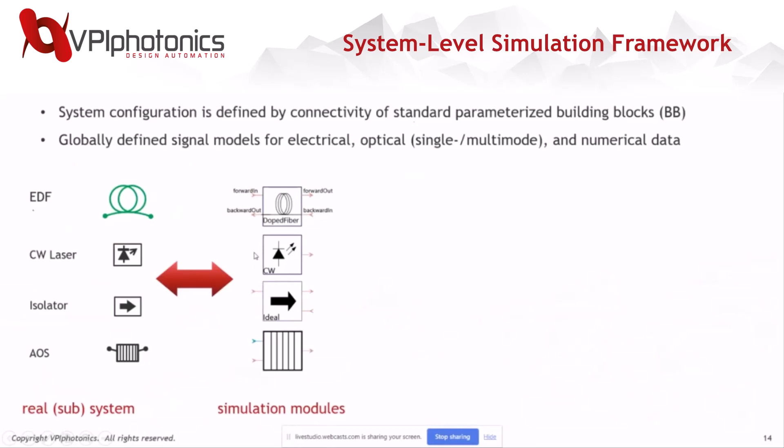Even in some cases, if there are no modules provided by default by our library, we provide a co-simulation interface for the users. This interface allows the users to create their own modules using, for example, MATLAB, Python, C++, and so on. One more important thing, once we have decided what module we want to have instead of our real component, we need to specify its parameters. For example, in case of the CW laser, this module will have several parameters that need to be specified by the users: its output power, its line width, its center frequency, and so on.

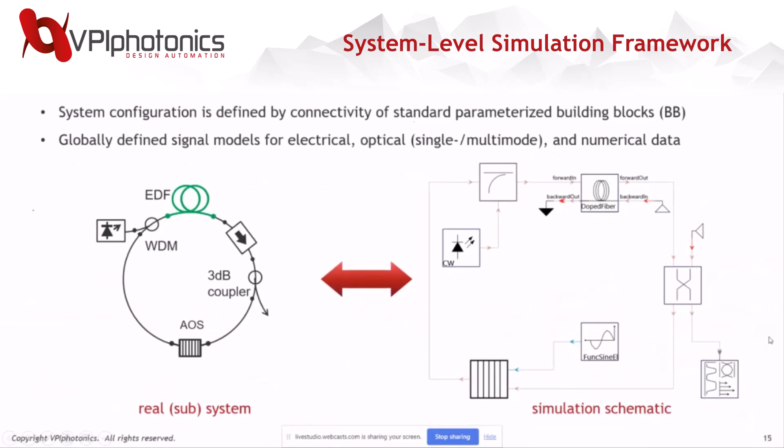And once we have decided what modules we want to use and their parameters, our next task is to combine the modules in the simulation in the same manner that they are combined in the real system. And this looks like a Lego-based approach. We provide a set of various components, and then using these components and combining them in different manners, the user can create his own simulation setup. And now when the simulation is composed, we can try to run the simulation. When we run the simulation, we use a so-called data flow approach to propagate our signal in the system.

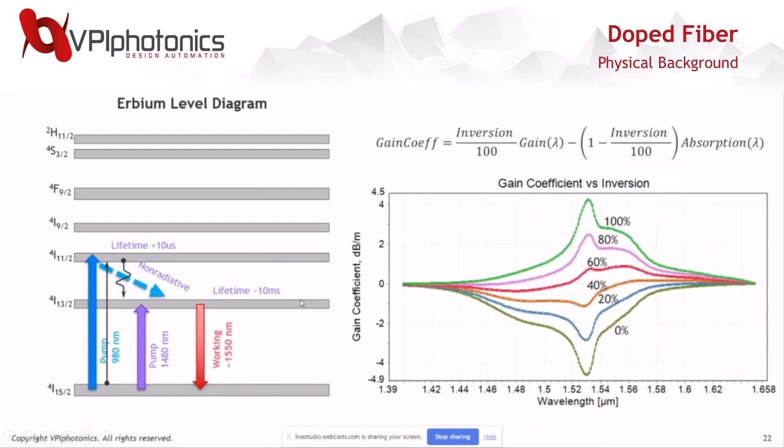And then when we have some excited ions, when the ions go back from the excited state to the ground state, they can emit photons. And these photons can be used to amplify our signal inside of the system. And of course, the higher inversion we have in the system, the higher will be the gain of the system, because fewer ions can absorb the photons in our signals.

And now let's talk how to describe this mathematically. So in our simple two-level system, we have three main processes. The first one is stimulated absorption of photons when the ions are being excited. And then the ions can relax through two processes: through the spontaneous emission, and this is not good because the amplifier creates additional noise in this case, and through the stimulated emission, and this is a good process when our amplifier amplifies the signal.

And for the stimulated transition rate, we can write down the following equation. To characterize the stimulated transition rate, we need to know the so-called emission and absorption cross-section of the erbium ions inside of the amplifier. Also, we have the spontaneous transition rate, and it's reciprocal to the lifetime of the second level.

And one more important thing that we need to know to characterize our amplifier is the so-called signal ion overlap factor. So this factor shows us how well the mode of our amplifier is aligned with the doping profile of the fiber.

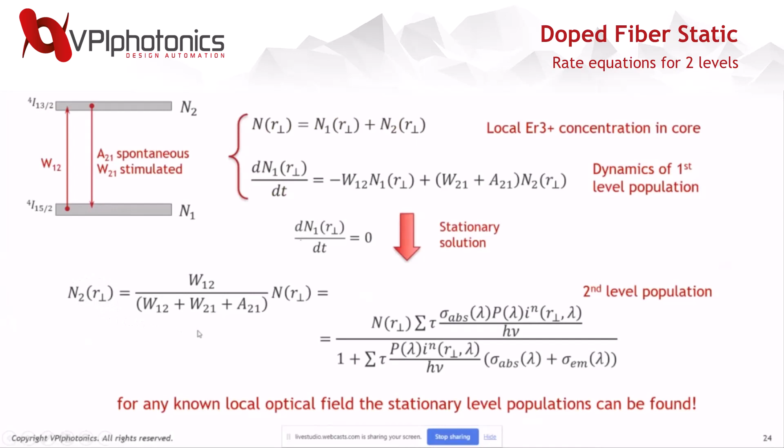And this is very good because now if we know the optical power at some specific fiber point, we can easily calculate the population inversion at this specific point of the fiber. And this allows us to write down the optical propagation equations.

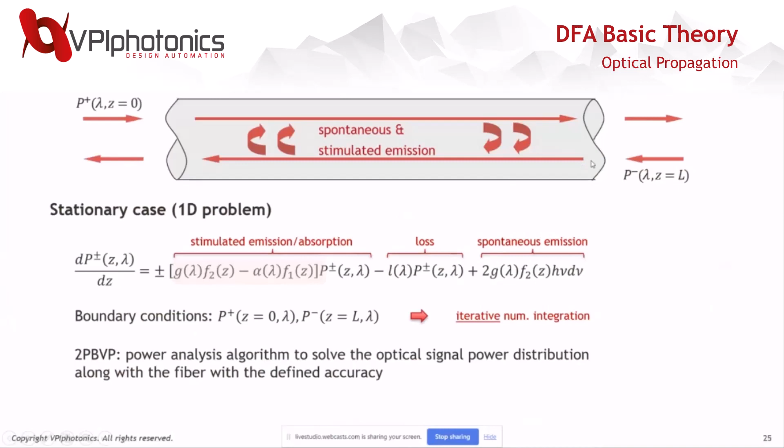This problem is called a two-point boundary value problem, a quite well-known problem, and we have standard differential equation solvers to find the power distribution along the fiber. And then we can even visualize this power distribution.

Okay, now let's talk about more complex models. Sometimes the lifetime of the third level can be quite long, and in this case we need to take into account the third level even for erbium ions. We need to modify the equations. Now we have three levels. And also we can add more terms that describe more complex behavior of our amplifier.

First of all, we can take into consideration excited state absorption, when the third or second level can additionally absorb one more photon. And also we have terms responsible for up-conversion. This is the effect when two ions interact with each other, and after interaction one ion goes back to the ground state and the second ion goes to the higher state. These are not very good effects, and they spoil the performance of our amplifier.

And in that case, using this nonlinear system of equations, we can find the level populations and then solve the optical propagation equations.

Just to sum up our single-mode doped fiber static model: it supports various doping types, including erbium, ytterbium, thulium, and erbium-ytterbium, and it can work with various signal representations, both detailed and coarse signal models. It can be characterized using Giles or cross-section fiber parameters. And it can take into account various higher-order effects, such as spectral hole burning, concentration quenching, excited state absorption, and many more.

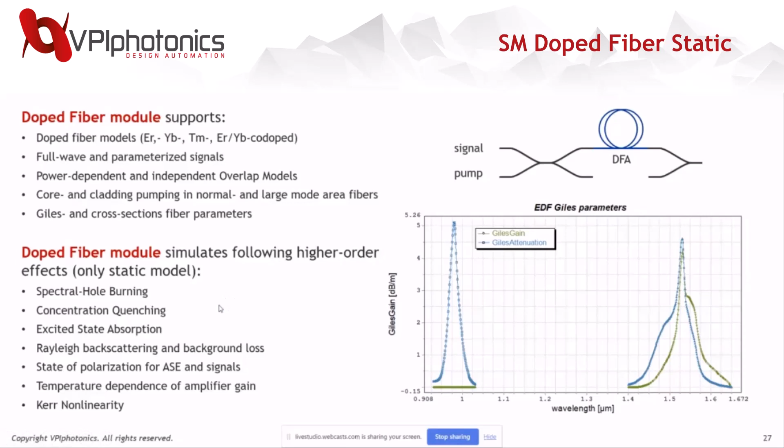Also, if we want to take into consideration multimode fiber, we have a model for this, and mostly it's very close to the single-mode fiber model. The only difference is that now we have to take into account several modes, and for each mode we need to separately calculate the signal-ion overlap factors, and also take into account that these modes don't have radial symmetry. So we need to calculate the integrals in a more complex way. Otherwise, it's quite similar to the single-mode doped fiber model.

Possible applications of this model are investigating multimode fiber amplifiers when we want to reduce mode-dependent gain, which we can do by optimizing the index profile, doping profile, and so on. Or we can use this model to simulate high-power fiber lasers by simulating core-cladding pumping and calculating all necessary overlap factors.

And also, we have a dynamic model. As I mentioned, the static model assumes that nothing changes in time, so the fiber amplifier is in dynamic equilibrium. But sometimes, for example in a WDM system, we drop or add channels, so the system will change its state because something changed in the system.

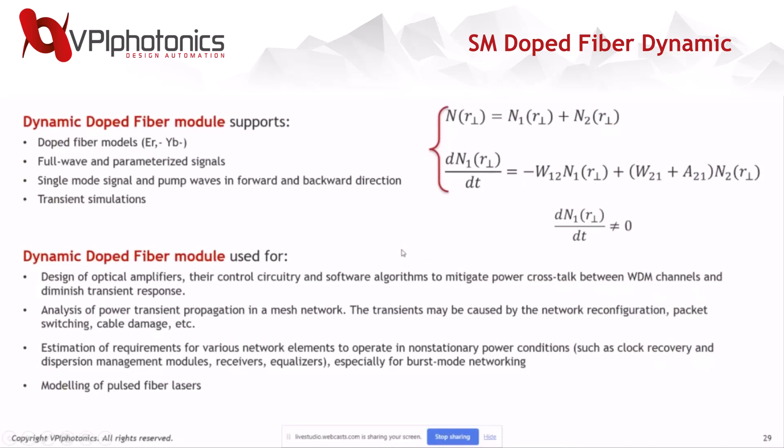Okay, and now I will jump to the software to show an example and how it works. So now you should see the software itself. So this is the simulation schematic that we are using. And here you can see the sketch of the experimental setup that we are trying to reproduce.

Also on the left, you can see our module library that provides various models for your real devices. For example, we have a folder called Fibers, and here we can find all fiber models that we have. And you can decide what fiber model you need to simulate this specific real setup. Yes, and now I will run the simulation.

And now we will briefly discuss what we have here. So here we simulate the high-power ytterbium-doped fiber laser, and the system looks as follows. We have two pumps on the left and the right, and as an active medium, we have a double-clad ytterbium-doped fiber, and to create a cavity, we have mirrors with a 4% reflection. To simulate this setup, we need to run several iterations to get a steady state solution.

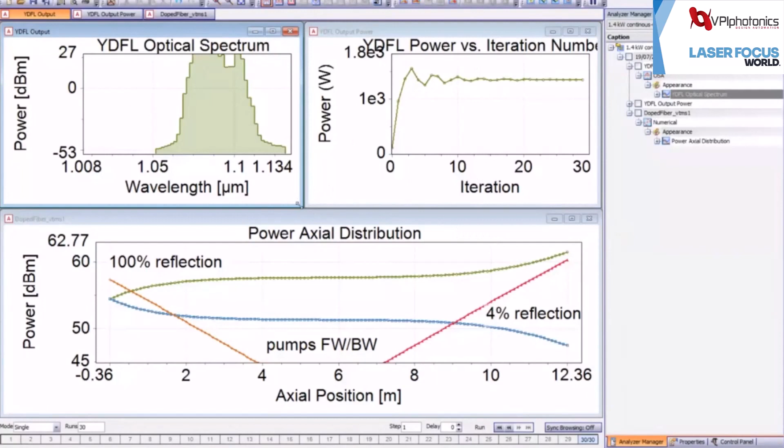And now we can see how it looks. Here we can see the output spectrum of our amplifier, and we can see how this spectrum was looking in the beginning of the simulation, and then how it was changing when our signal was traveling in the cavity back and forth. And finally, here we have a stable output spectrum.

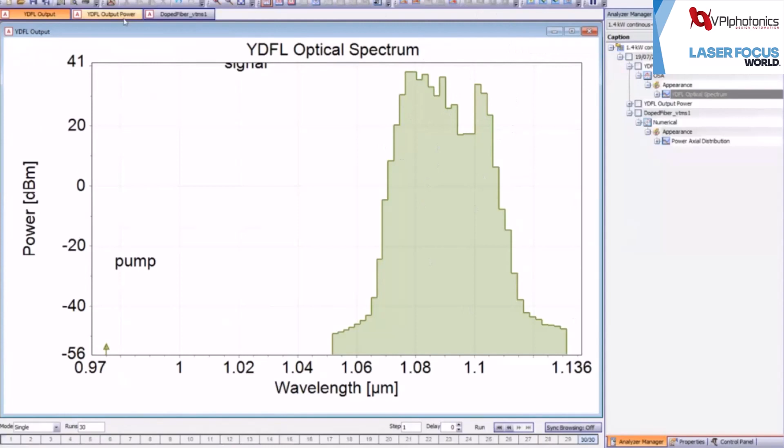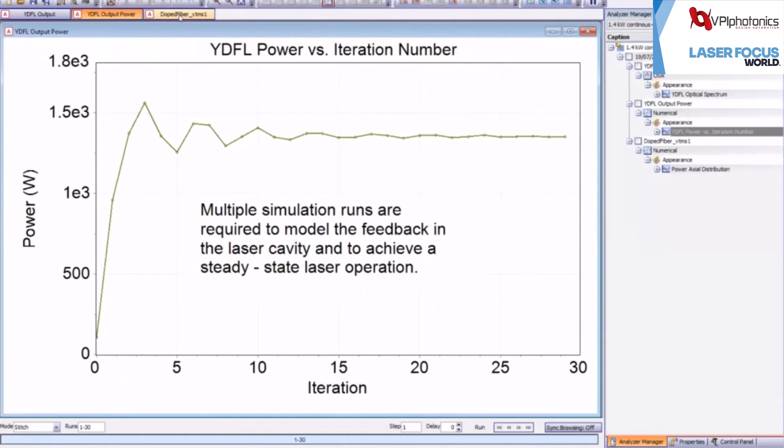Here we can see that when the signal is reflected on the right side of the fiber, it's amplified in the beginning due to this backward pump. Then it travels through the fiber without any amplification in the center, and again on the left side of the fiber the signal is amplified due to the forward pump.

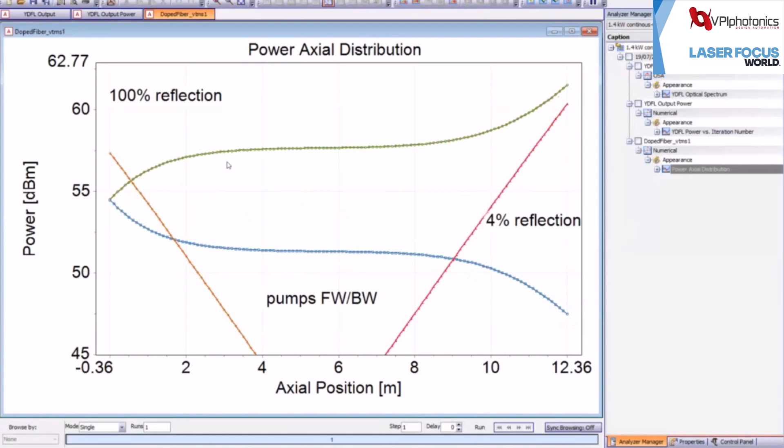Then here we have 100% reflection, and the signal starts traveling back, so it's amplified in the beginning of the fiber, in the center not so much, and finally the signal is amplified at the end of the fiber due to the backward pump. And finally, here we have a 4% reflection mirror, and that means that 96% of laser power leaves the fiber, and 4% is reflected. And again, we start the cycle when the signal travels back and forth in the cavity.

Okay, jumping back to the simulation. So again, here is the simulation setup and the simulation results. Also, we have compared our simulation results with experimental results, and our simulation results were in quite good agreement with experimental results.

Okay, and now let's talk about the undoped fiber models. Now we are talking about usual silica fibers that are used to transmit the signals between the network nodes and so on. And again, the problem is quite similar. We know what we put inside of the fiber, but we want to know what the fiber's output is.

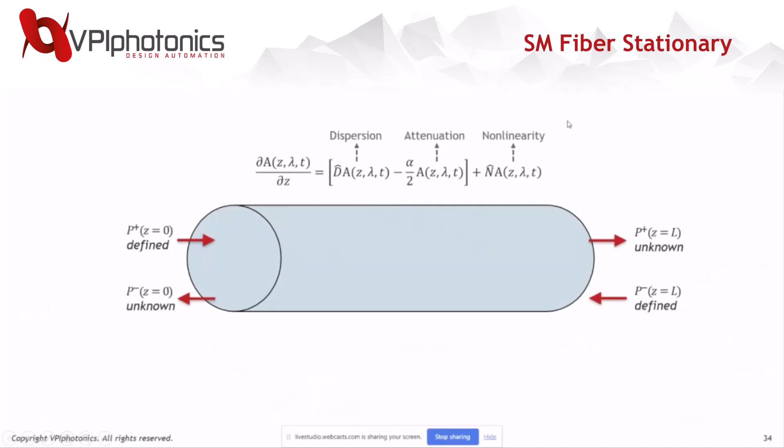To describe the signal propagation in the fiber, we need to use the nonlinear Schrödinger equation. In this equation, we need to take into account the dispersion effects in the fiber, the attenuation of the fiber, and also the nonlinear effects. The nonlinear effects include Raman scattering, Brillouin scattering, Rayleigh scattering, Kerr nonlinearity, and many, many more.

And of course, if we try to solve this problem as it is, using this nonlinear Schrödinger equation, we will have problems because the dimension of this problem is quite high. We will have a 2D grid that takes into consideration the time and the position along the fiber. And if we try to solve it, it will be quite hard.

And for this, we developed a so-called two-step approach to make the problem simpler and to speed up the simulations. We divided the problem in 2 steps. So at the first step, we replace our signals with their parameterized or time-averaged representations. And at this stage, all effects of counter-propagating waves will be averaged in time.

And in this case, we can again solve a 2-point boundary value problem to find the power distribution along the fiber. And at this step, we take into consideration various effects such as Raman gain, spontaneous and stimulated Raman scattering and Brillouin scattering, as well as Rayleigh scattering and many more effects.

And once we have found the power distribution along the fiber, we can go to the second step, to the split-step Fourier method for the field analysis. Now the signals are not replaced by their time-averaged representations, but we use the sampled signals, and we calculate how the fields propagate inside of the fiber, solving the usual nonlinear Schrödinger equation.

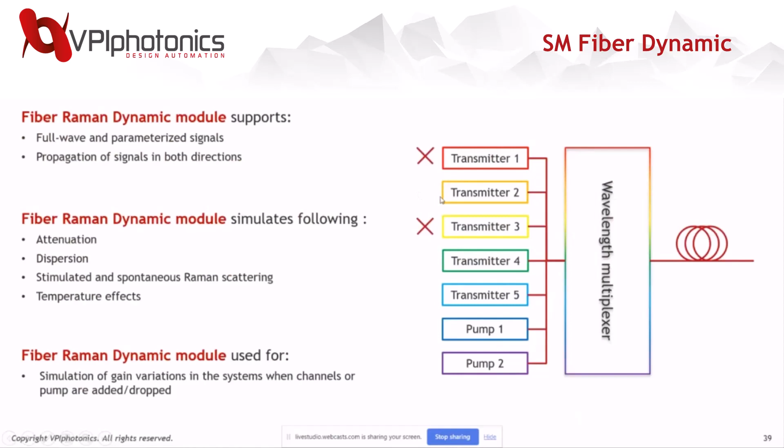So we have the signal on the left side, and we put it into approximately a 200 kilometer piece of fiber. And there the signal is amplified in the beginning using the Raman pumps. Then it reaches the EDFA module. And the pump for this EDFA module comes from the receiver side.

And this pump also propagates in the same fiber as our signal will be propagating after the amplifier. And this allows us to perform 300 kilometer communication without repeaters in the system.

And now I will jump back to the software. And here we can see the system that corresponds to this remote optically pumped amplifier. So here we have 10 WDM channels, and each has a power of 0 dBm. And here we have 2 Raman amplifiers, and these 2 signals propagate together in the second fiber span. And in parallel, I will run the simulation.

Sorry, I lost the proper file.

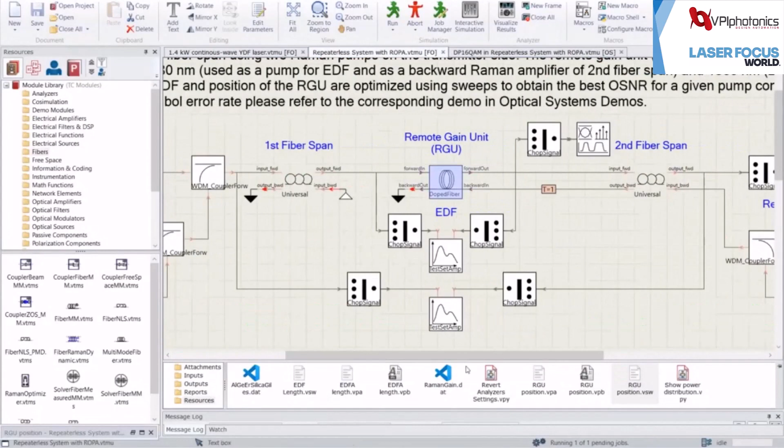Yeah. So now the simulation is running, and here we have the erbium-doped amplifier, and the pump comes from the receiver side. So here we have 2 pumps: the first order Raman pump at the wavelength of 1478 nanometers, and we also have the second order Raman amplifier pump to amplify the first order pump.

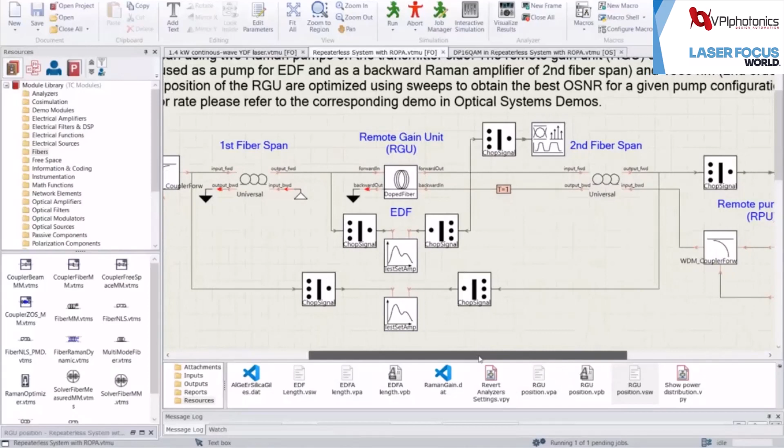This EDFA pump travels through this piece of the fiber and then reaches the EDFA to amplify the signal we are interested in. Now we have a question. So how should we optimize the system? And are there any parameters that can be optimized to get the better performance of the system? And it turned out that, yes, we have some parameters that we can optimize.

So first of all, we can optimize the position of our remote gain unit. So one option, we can place it very close to the receiver, for example, 50 kilometers, to get the higher pump and gain in the system, or we can place it rather far away from the receiver to amplify the signal when it's not so weak. And using simulation, we can investigate both options and see how it affects the signal.

So first, let's look at the situation when the amplifier is placed quite close to the receiver and pump. Currently in this example, the distance to the pump is 50 kilometers. So here we can see the optical spectrum of the signal after propagation in the whole system. And here we can clearly see that the noise in the system is dominated by the amplified spontaneous emission of our EDFA. One more thing, we can visualize the output OSNR of our signal. And now we can see that the OSNR in the system is approximately 18 dB.

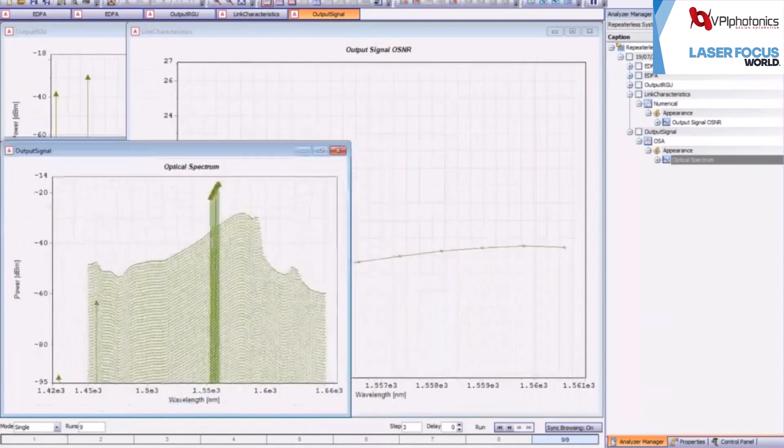Now we can place the amplifier quite far away, for example, 130 kilometers. In this case, the pump is quite weak and it almost doesn't amplify the signal. And now the noise in the system is dominated by the spontaneous Raman scattering noise. And again, we can check the output OSNR of our system, and now it's even worse. It's 14 dB. And this means that there should be some optimum point between these two.

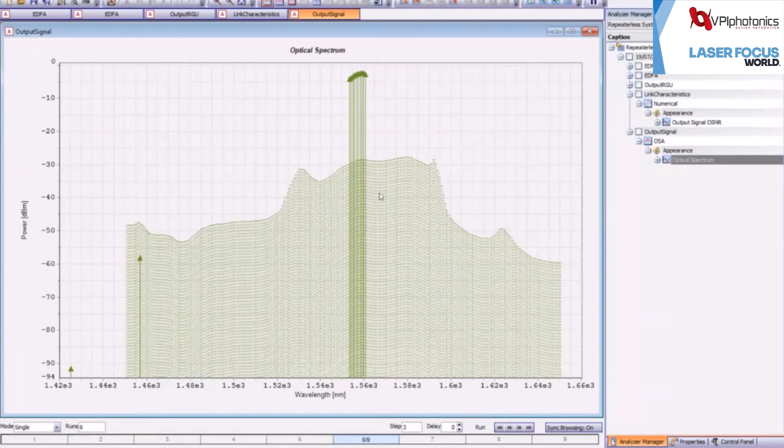And we can easily check this by looking at the OSNR and how it changes when we change the distance from the receiver to the amplifier. And it turns out that the optimum point is 100 kilometers. At this point, the OSNR figure has the best value, and it is approximately 26 dB. And also we can check the output spectrum of our amplifier. And now we can see that here we have found some trade-off between the amplified spontaneous emission of our EDFA and the Raman spontaneous scattering in the usual undoped fibers.

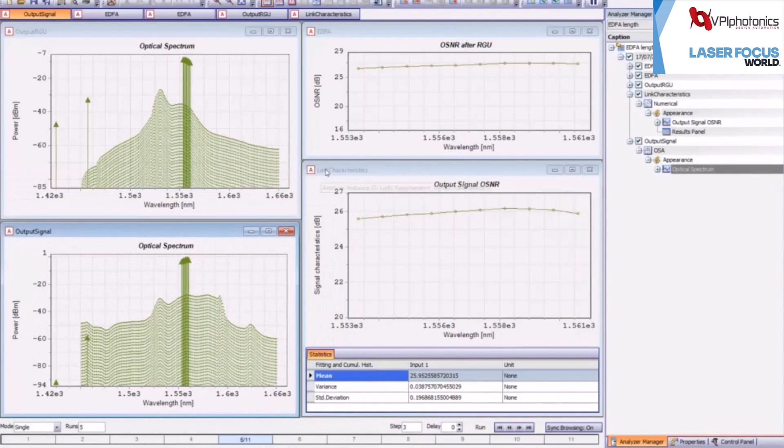Also, one more thing that we can try to optimize is the EDFA length. Now I will just visualize results without running the simulation. And again, here we can check the output OSNR of the signal for a very short fiber, 5 meters, and for a quite long fiber, 15 meters. We can see that for the 15 meters, we have a worse OSNR because the fiber has produced a lot of amplified spontaneous emission. And by checking the OSNR figure, we can see that the optimum EDFA length is approximately 8 meters.

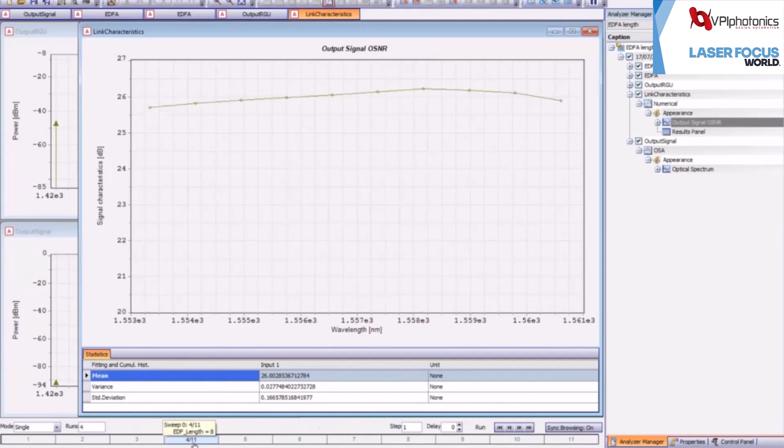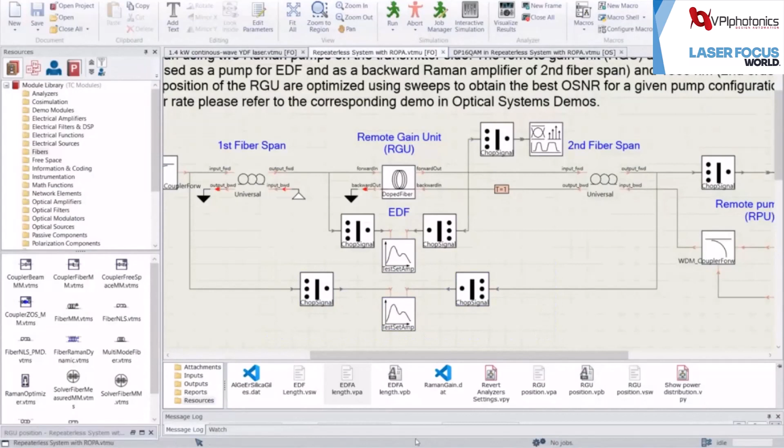Okay. Using these simulations, we have optimized the OSNR figure of our system. The OSNR figure tells us that our system is quite tolerant to the noise. But one more important effect in communication systems that must be taken into account is nonlinearities. And to check how the signal is distorted by the nonlinearities, we need to use sampled signals and try to transmit some dual polarization 16-QAM signal, for example.

And to do so, we need to use not the fiber optics simulation framework, but the optical systems product. And also we need to do some transitions between the models. So first of all, we need to replace the coarse representation of the parameterized signal with more realistic sampled signals, where we store the information about the amplitude and phase of our signals. In our particular example, we will simulate 10 WDM channels with 28 gigabaud dual polarization 16-QAM signals.

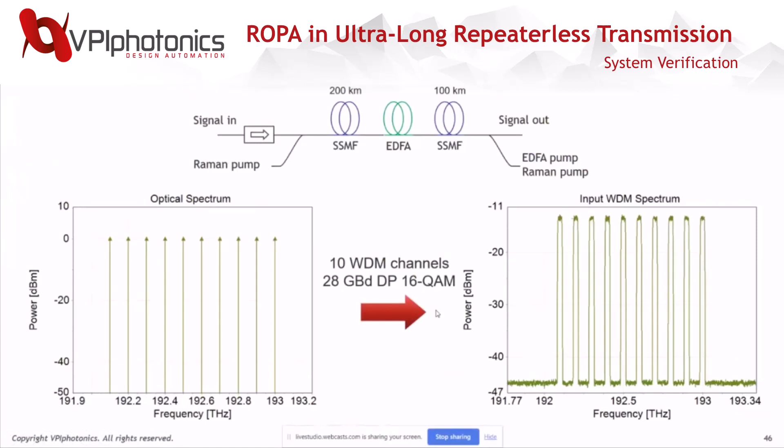One more thing that we need to do is to replace our physical EDFA models available for the fiber optics with some black box amplifier.

As I mentioned before, our physical models require the Giles parameters, cross sections of the erbium ions and fiber length, doping profile of the fiber, and so on. And usually for the system level simulations, all this information is not available. What do system level simulations use? They use just the gain and noise figure of the amplifier.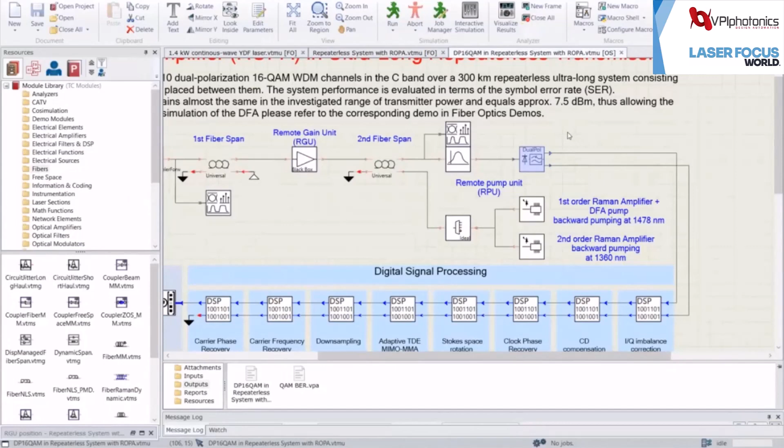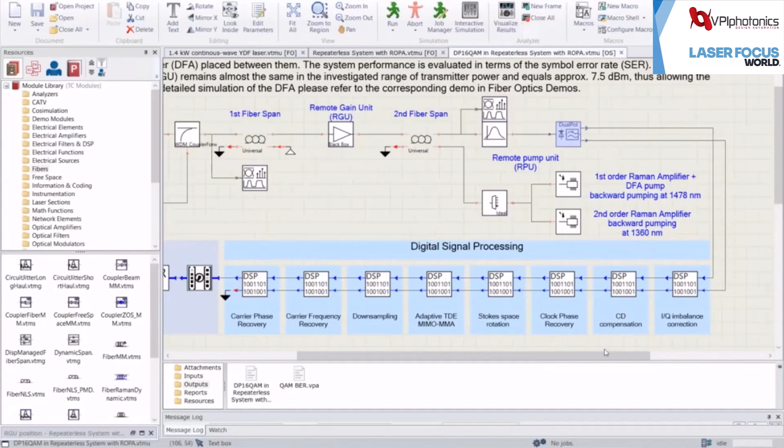And finally, we have a coherent receiver with some non-ideal characteristics. And to compensate these non-ideal characteristics, we need to add a digital signal processing chain, which includes the modules that compensate the receiver non-idealities, such as the IQ imbalance or some time delays in the system and so on. And also we need to compensate the chromatic dispersion and the polarization mode dispersion inside of the system.

And now, as I mentioned, we are using the sampled signals, and now the simulation takes more time because the signals are quite complex. And I have saved the simulation results just to show them. So here we can see how the symbol error rate of our system depends on the power of the channels that we transmit. For a low launch power, we have a rather high symbol error rate due to the spontaneous emission and Raman scattering inside of our fibers. So with this low launch power, our signal is distorted by noise.

Then, if we have very high power, the noise is not so relevant anymore, but now the nonlinear distortions of our fiber come into play, and again, the symbol error rate becomes quite high. So that means that we again need to find some trade-off between the noise of our system and the nonlinearities of our system. And so here we have an optimum point of -2 dBm that gives us the minimum symbol error rate in the system.

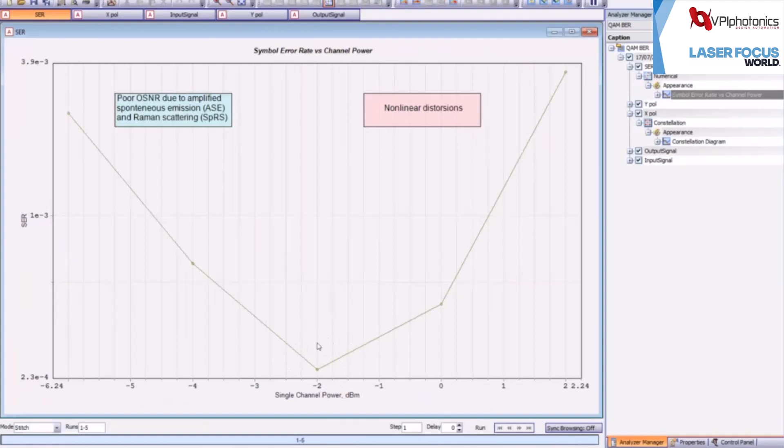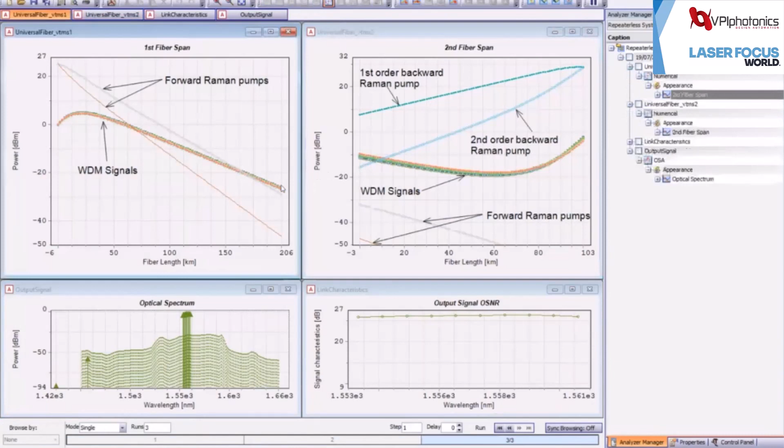And one more thing that we can do, we can also visualize the power distribution along our fiber link to see how our signals change along the link. Here we have two plots. The left plot shows how the power of our WDM signals changes along the fiber. So here they are just a bit amplified in the beginning of the fiber due to the Raman pumping. Then between these two plots, we have an EDFA that gives us approximately 15 dB gain.

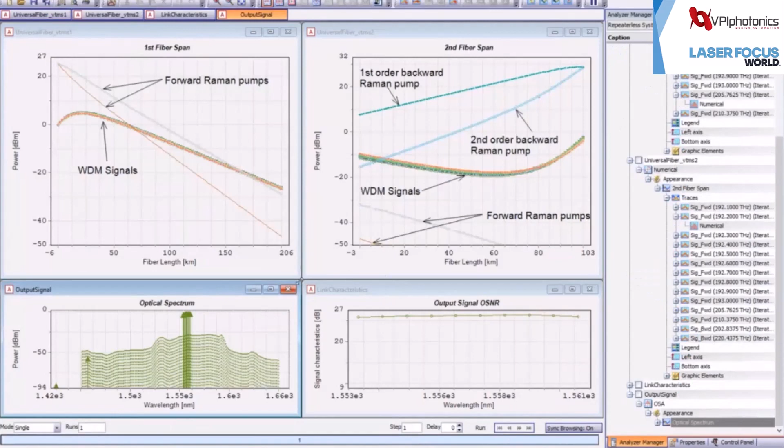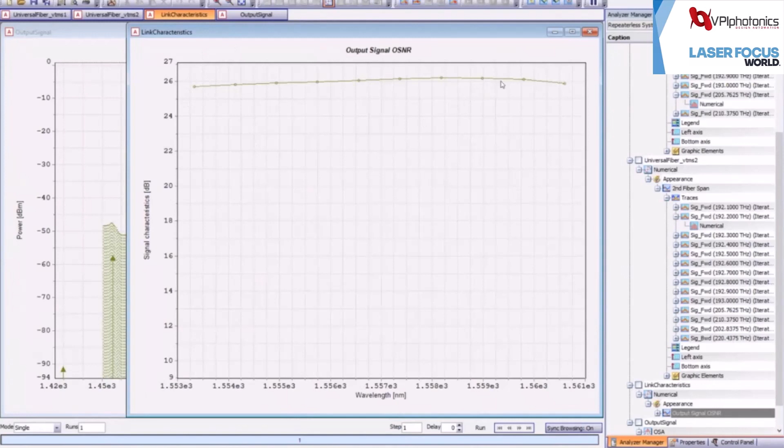And finally, here we have the WDM signals in the second fiber span. And again, these signals are amplified in the end of the fiber due to the first order and second order Raman pumps. And finally, we can see the output spectrum of our signals that corresponds to the optimal parameters and the OSNR figure that corresponds to the maximum and the better performance of our system.

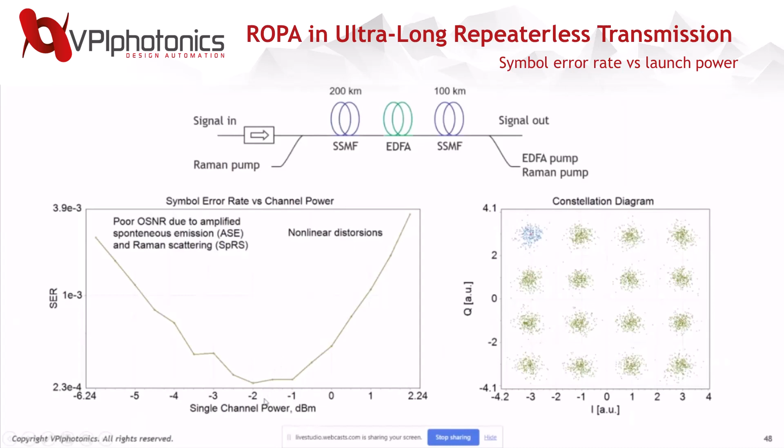And yes, jumping back to the simulations, we can also visualize the constellation diagrams of our signals and also try to find an even more optimum point for the channel launch power by making a smaller step, changing it by, for example, 0.5 dB or even smaller. Okay, and now I give the floor to Chris. Yeah, thank you, Piotr, for that.

And then just to summarize here, as you can tell, the modeling and simulation of fiber-based devices is not a simple task. There's a lot of equations, a lot of different types of fibers, a lot of different strategies you can use. So at VPIphotonics, what we're doing is providing a set of models for simulating those different types of fiber lasers and amplifiers. And this tool, VPI Component Maker Fiber Optics, also allows for the simultaneous simulation of both doped fiber amplifiers and Raman amplifiers. And usually it's not enough to just have the simulation for the fiber-based device, but it often needs to be simulated in a full system level simulation. And so that's what we provide with our VPI design suite as well.